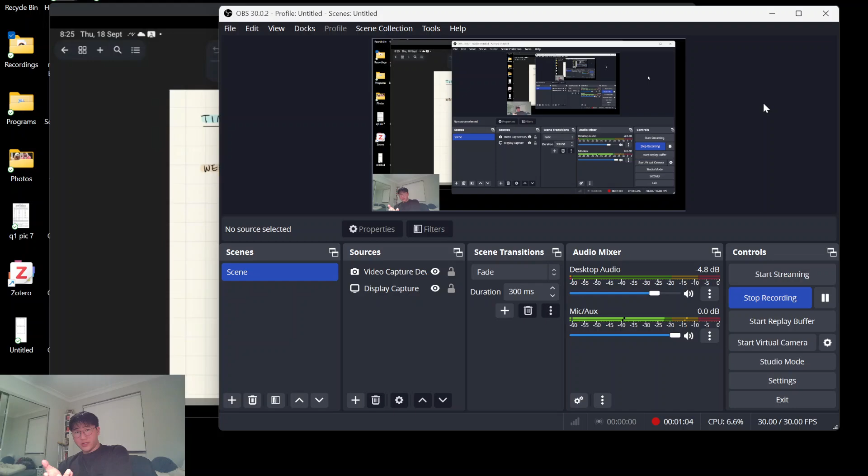With that said, this course is really cool. I got really into timber after simultaneously taking this course and doing my undergrad thesis on a timber related project to do with glue lam timber, which I'll explain in a bit. I liked it so much that even before I started working as a grad structural engineer, I got into a little woodworking phase. So you'll find that - I'll get some examples as we go through this video, like I have some offcuts from woodworking.

So, without further ado, we'll get to my notes.

Week one. So I guess how this course is broken up is into two parts. Week one, we're just talking about timber as a material, and there's a code - AS1720.1, which is our timber code for Australia. All timber structural engineering design revolves around this code. We'll get into the difference between sawn timber and EWPs, but this code documents both types.

Also something else we'll need is AS1170.0, which is our load combinations - if you've done steels and concrete, you'll know what those are, but we'll talk about it a little bit later.

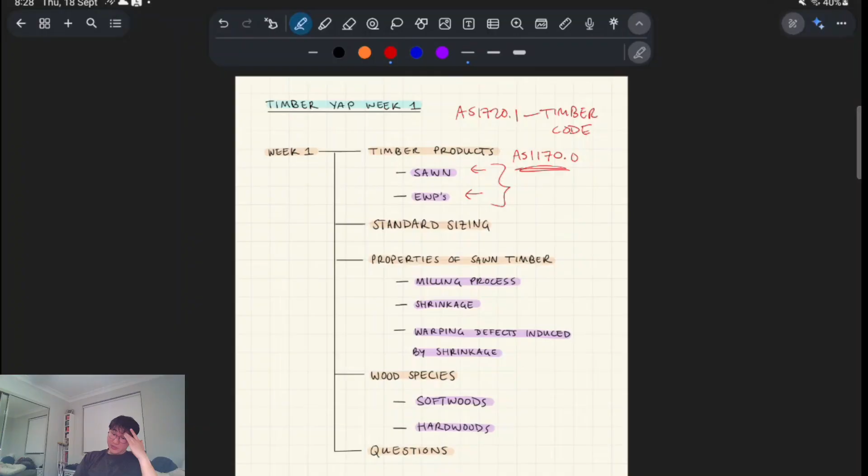This leads to a lot of variability factors in the code. If you think of it like a spectrum of materials, you have steel as the most consistent material, then concrete, then timber as the most variable, because you'll find a lot of natural defects and inconsistencies with how you can grade wood. So timber is very variable, and it requires a lot more fundamental understanding of how it works than the other materials in order to design for it.

So let's get into the rest of the stuff that I've shown on screen later.

As I mentioned, you can have sawn timber and engineered wood products. Sawn timber is basically what you can buy off the shelf at Bunnings, or order from manufacturers - in Sydney we have Blacktown timber suppliers, I think they're called, and those kind of timber yards, timber mills, timber suppliers.

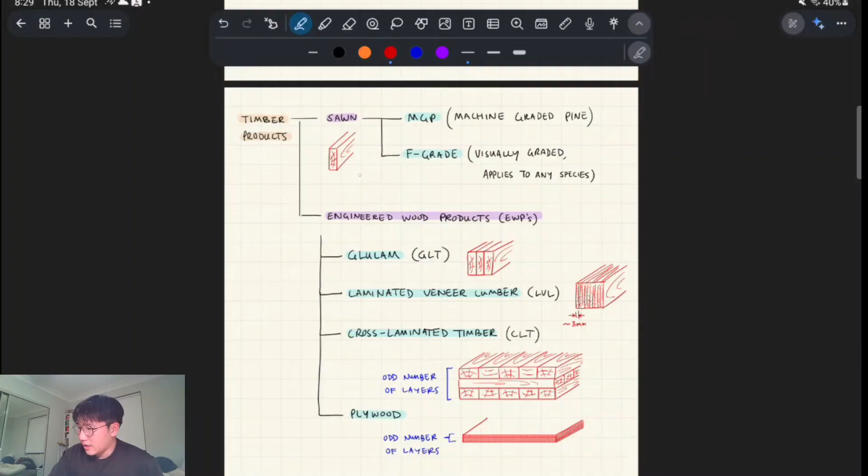In America, they call the woods by their cross section, like 2x4s, 2x6 - that's in inches, which I think is denoted by double dash. You might have heard those terms before - that's just referring to the cross-section size, that dimension, and these are products. If you order it from Bunnings or whatever, you can get it in standard sizes - I think it's like 6 meters typically, maybe 9 meters as well. I'm not sure, but it's whatever the mill size is generally.

In terms of different grades of timber, a timber grade is basically this: you get a pile of logs, you mill it, cutting and processing it into rectangular cross sections.

So what makes one bit of sawn timber stronger than another? There could be variations in the type of tree, some trees more mature than others, variation in species, and variation in natural defects, like a knot in the timber, which would actually be a structural defect.

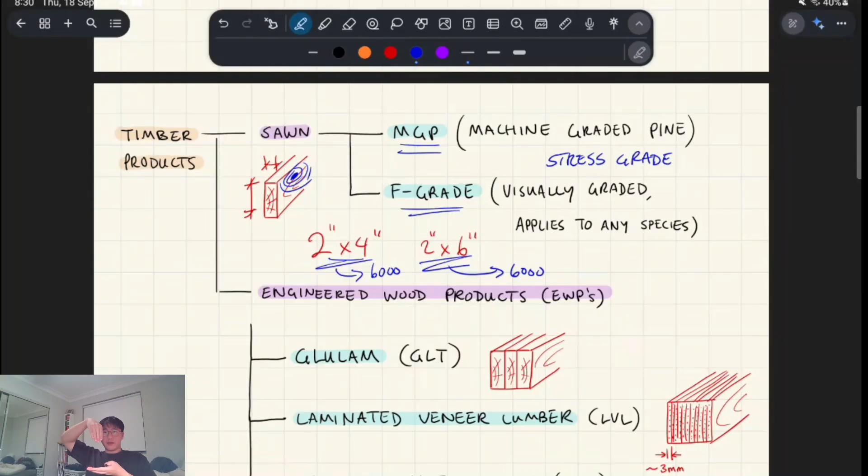So we have to basically stress grade timber. You can stress grade it or destructively grade a batch where you completely break the plank of wood, but usually we stress grade it. There's a little needle that pushes into the timber and does a quick calculation on stress and strain to work out the elastic modulus, the material stiffness. That's how we separate these grades of timber.

For example, we have MGP10, MGP12, MGP15. That would equate to roughly 15,000 MPa in the code - a more specific number for timber stress, elastic modulus. That process I just described was machine grading.

They get the little needle on a conveyor belt - boom, test, stress grade - and it's non-destructive, so you can still use the bit of wood afterwards. Then conveyor belt, stress grade, and keep going.

So MGP uses pine - what is pine firstly? Pine is a fast-growing type of tree, grown on sustainable farms. One problem with timber is that trees can take a very long time to grow, maybe up to 20 or 30 years to mature depending on the type. But pine is a type of softwood, and softwoods generally mature much quicker.

With sustainable radiata pine farms - radiata pine being the species - you can plant more trees than you chop down, essentially. So pine is a very widely used material for that reason. Its strength is okay, but usually on the weaker side compared to hardwoods. Anyway, we use it a lot and can mass produce it through this machine grading process - MGP is a very specific type of product which uses radiata pine.

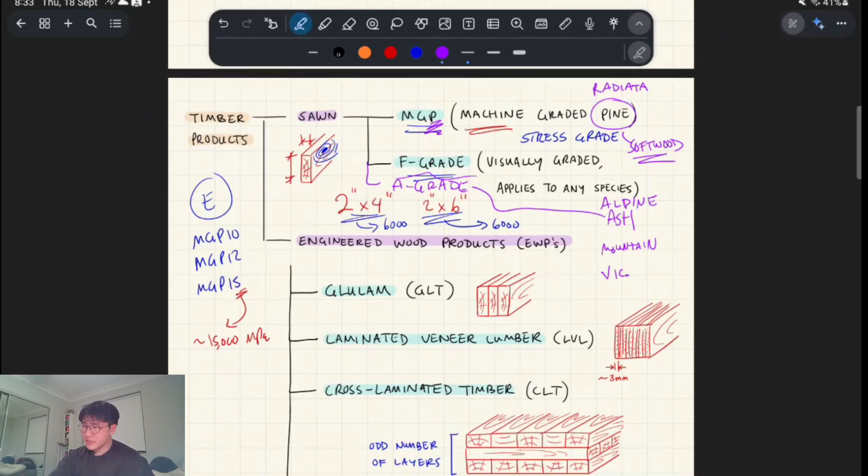But yeah, so that's kind of how sawn timber works. Engineered wood products, sometimes shortened to EWPs - although I think that's just a term people who write papers on timber use, myself included when I was doing my research thesis.

Because in industry, it's more common to use EWP to mean elevated work platform - like in trade, they'll think you're talking about a type of scissor lift, for example, which is an elevated work platform. But in the context of this course, we're going to be calling engineered wood products EWPs.

So there's various types. I've only listed a few, probably the most common ones, and I think these are the only ones in the code - though it's not actually limited to this. I'll give some examples of ones which aren't as used structurally in a bit, but I'll talk about these first. So glulam is basically used as beams.

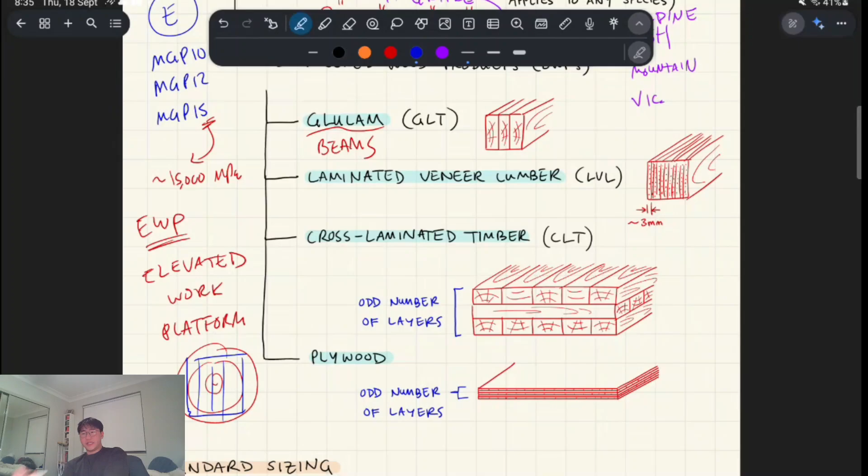Generally, beams are limited by how big the cross section of a tree trunk is, so it's very hard to create large cross sections unless you engineer your own by gluing multiple pieces of wood together. You can stack up, say, 9 layers of planks and get to pretty large member sizes.

That's called glulam, and there are companies that specialize in it and create these GL grade products, as it's called in the code, which are usually used in mass timber buildings.

So mass timber - there's residential timber buildings and there's mass timber buildings. Residential timber buildings are like your stick framing kind of homes. You see it a lot.

It really started in America, where you use a series of sawn timber members, usually treated pine. You'll see the timber is actually green or blue because it's been sprayed with insecticides or fungicides, so that if it rains you're not going to get fungus that affects the durability of your timber frame. That's very common in residential timber construction.

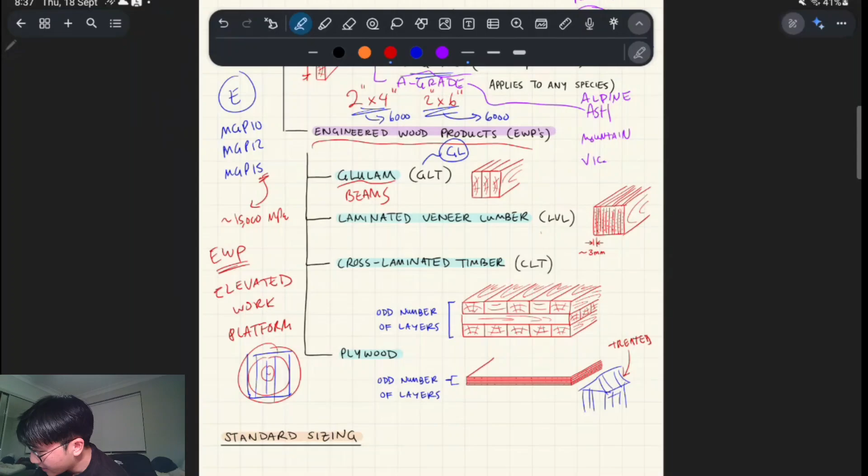You'll see these engineered wood products generally used for mass timber buildings. Another one is LVL - laminated veneer sheets, which are laminated all together to create essentially large beams as well. These are also used for beams.

But the use case is a little bit different. You use more epoxy as the adhesive or glue - you can also use polyurethane, I think those are the two most common ones. Because you have more layers, you use more epoxy, and it actually ends up being stronger than glulam. It might be more expensive, I'm not actually too sure about that.

But you can also curve your beams. If you want to create a parabola shape roof or something like that, you can do that with glulam over large spans, but you have a lot tougher time creating that curved shape unless you have really thin layers which are very bendable. So LVL is quite good for that.

CLT is similar to glulam, but you're usually using it to create entire floors, or slabs. You have these sawn timber cross sections stacked next to each other in one layer, and on top of it you have layers going the other way, perpendicular at 90 degrees, and then another one stacked on top. You always have an odd number of layers - you can have 3, 5, 7, maybe up to 9, but that's getting pretty ridiculous.

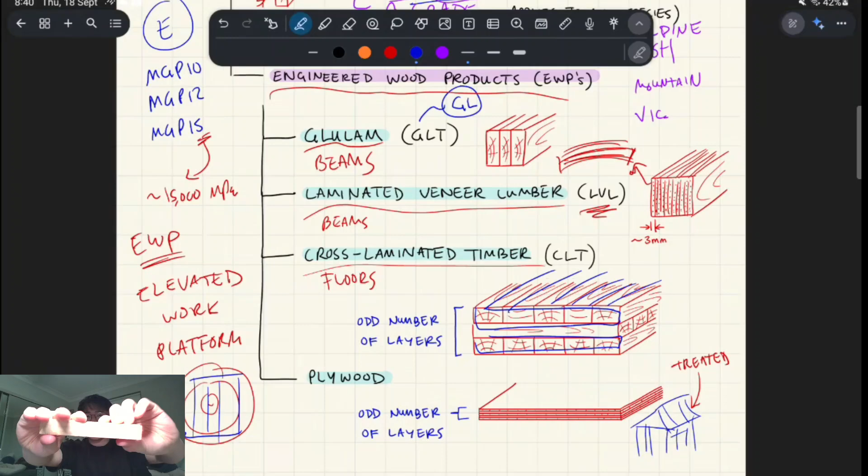So essentially, you can see these fibers running kind of parallel - that's the longitudinal direction. And then you can see the cross section - this one's better, you can see the cross sections have all these little straws, like straws, and that's the end of the fibers. If we bend in this direction, parallel to the grain, you basically have stronger properties. So the longitudinal direction runs this way, and there's 2 layers of that, and then in the minor direction we have longitudinal layers running that way - that's the minor direction.

So if you think about calculations, this will come into play like in week 5 maybe.

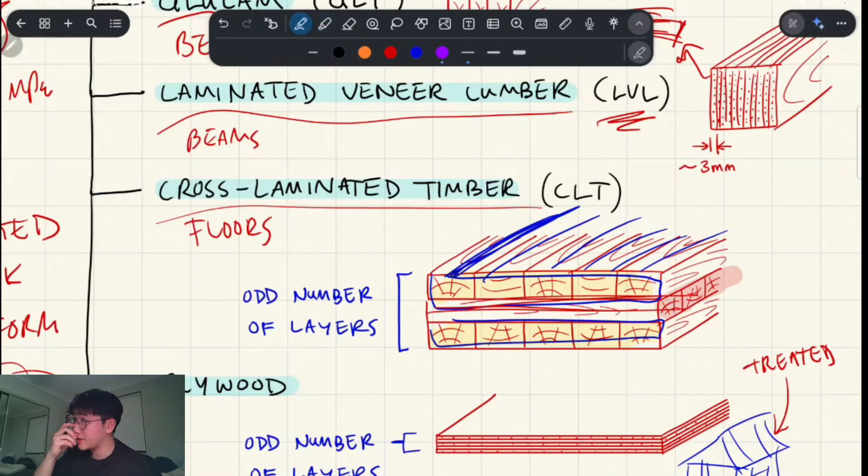This is the cross section, and when we're considering CLT design, it's going to use a different code to the Australian code, which I forgot where I wrote. So it's different to that. We're going to be using Eurocode 5 for CLT design, right?

So basically, to calculate the effective centroid, or neutral axis I should say - that's the bending axis, right? To calculate that, we ignore all the layers which aren't facing in our direction that we're considering. So if we're considering the major direction, which is what I've highlighted in yellow, the neutral axis will be positioned in between that. So if we have 4 layers instead, right?

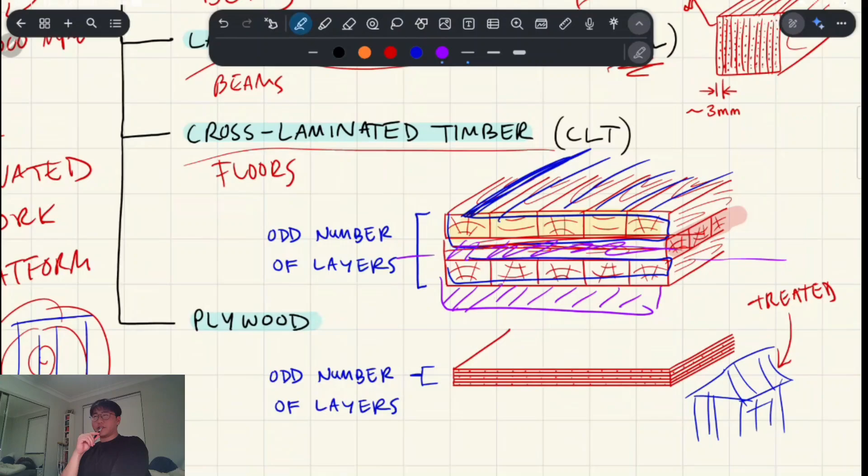The neutral axis becomes unsymmetrical. So it becomes like here and here. And if we have this going on, you're going to end up with worse calculations than if you had an odd amount of layers. So that's what I'm trying to say there.

The same principle applies to plywood, but just on a much smaller scale. If you've done woodworking or anything, you've probably seen plywood, and it's very thin - like this would be 13 layers of ply, I don't know how thick it would be, like 3 centimeters or something, maybe not 3 centimeters, maybe about 2.5 centimeters, whatever. So that's what happens when you have an odd amount of layers - it has better, more dimensionally stable properties.

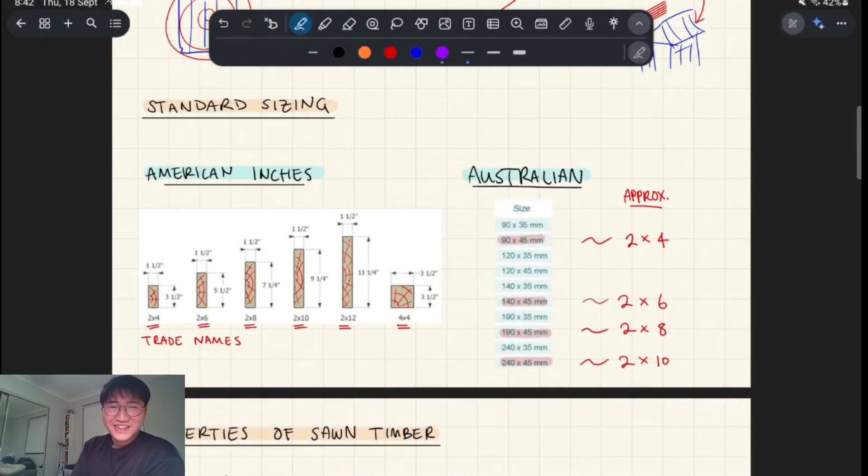Okay, cool. Because I normally would record these weekly in front of people, I would stop and ask if people have questions, but because it's just myself and I'm recording this offline, I'm just gonna be rambling.

So yeah, okay, so standard sizing, as I mentioned, we kind of have these trade names, American trade names, right? And you have like 2x4s and 2x6s, etc. But in reality, there's...

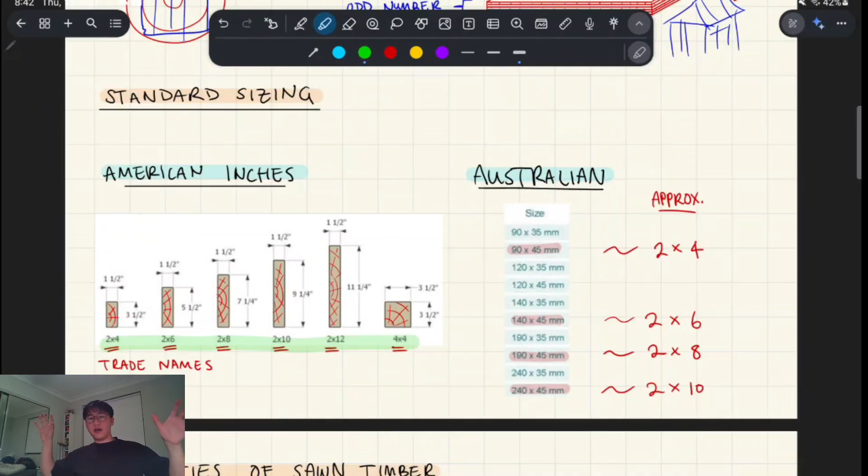The real dimensions - so this is in inches, right? A 2x4 would actually be 1.5 inches by 3.5 inches. And in my opinion, this comes down to the whole processing of the timber.

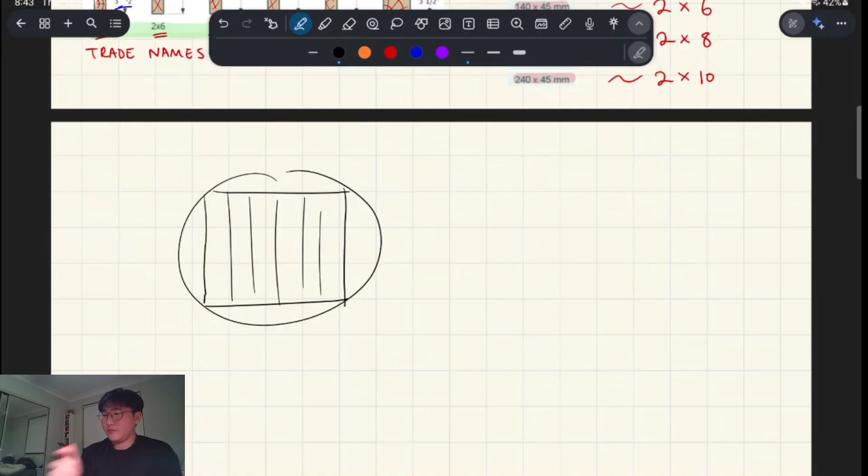So if you have a tree log like that and you're cutting it, right? And so you're just cutting it like that. The blade has a certain thickness which erases material. And if we're trying to, I don't know if this looks exactly like this, maybe like that - if we're trying to make a 2x4, I'm just gonna do this in inches because whatever. And we're doing something like this, right? Because our blade cuts and does that, we've eliminated some material already, right?

And then this stack of rough sawn wood gets placed, and it came from a live tree, so it needs some time to dry, and it's in a process called seasoning. And in that process, it's going to shrink a little bit and warp, and so we're going to get some undesirable properties.

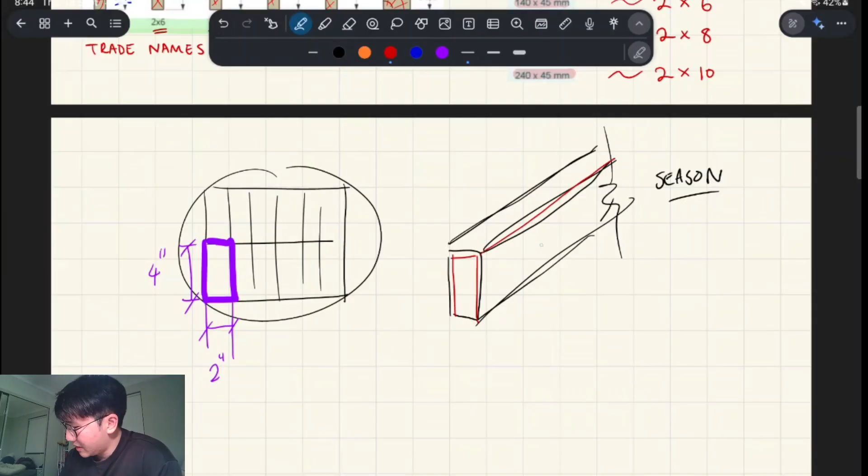Now, at this stage, if you want to refine your wood to be perfectly square, as in like these cross sections perfectly square, we're going to have to erase material again. And in that process, we're losing more and more of our cross-sectional dimension. Cool, so that's how that works.

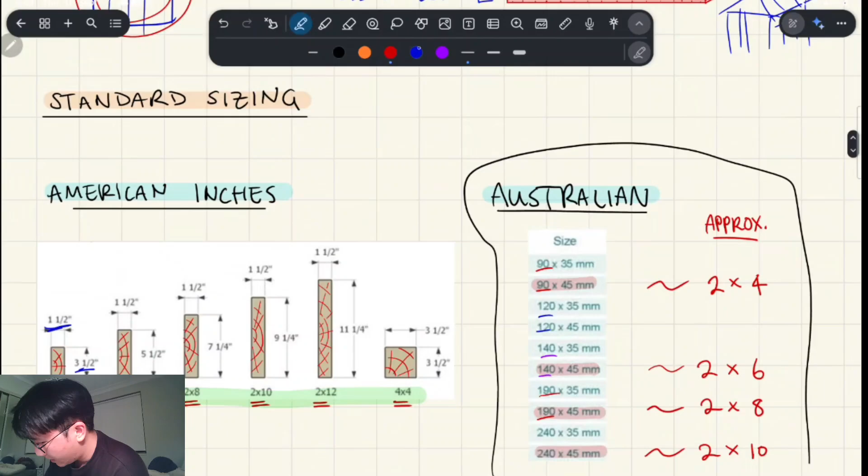So those were American kind of units. In Australia, we have various depths, right? We have 90, we have 120 - these are the standard depths - 140, 190, and 240, right? The list goes on, but I've just included the common ones. And between these, you can see that we have two standard widths as well - you have the thinner one, which is 35, and the thicker one, which is 45. And those will have different kind of use cases as well. Yeah, so that's kind of how that works.

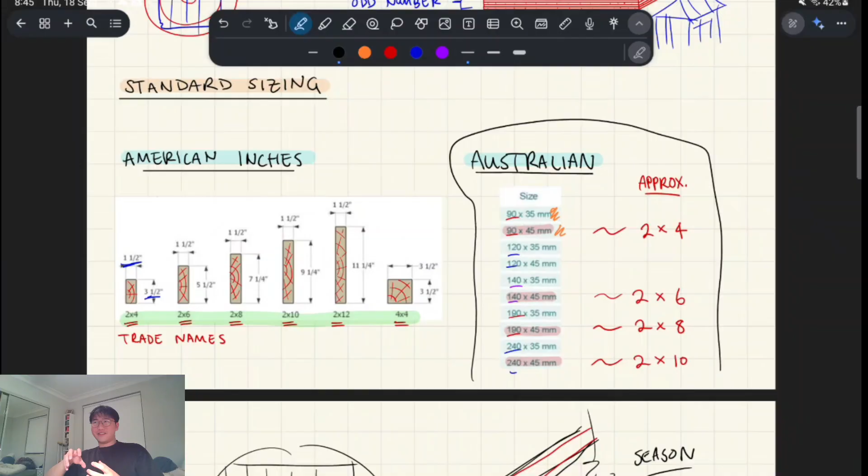And think of the sizing like, you can make your own section sizes, but these are the ones that are milled and mass produced. And it's good to have standard sizes - it's similar to Lego, you don't want all your Lego to be slightly different sizes, because then they can't fit together, right? So anyway, think of it like that. They come in standard sizes essentially.

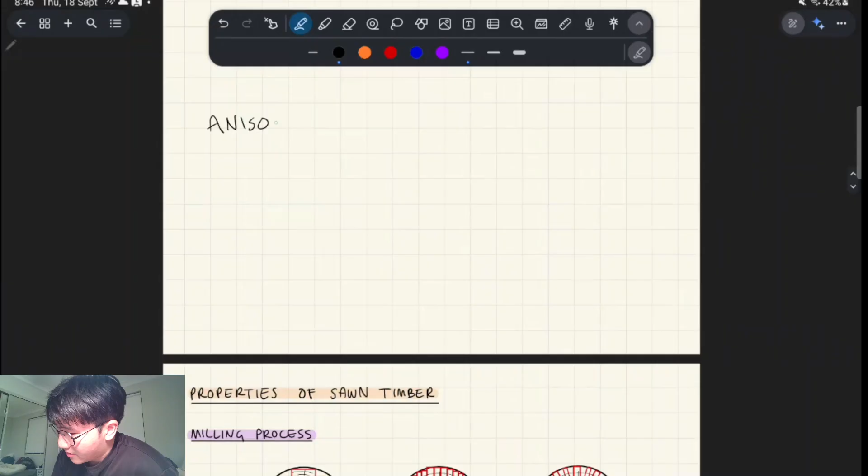Okay, so milling process. We have a few different types of ways that wood is sawn, and this will tie into something we're going to talk about in a second called shrinkage. But you'd think that this is pretty trivial, right? Like how you cut the wood doesn't really matter, but in reality it does, and that's because wood is an anisotropic material, right? Which means it has different behavior in different directions.

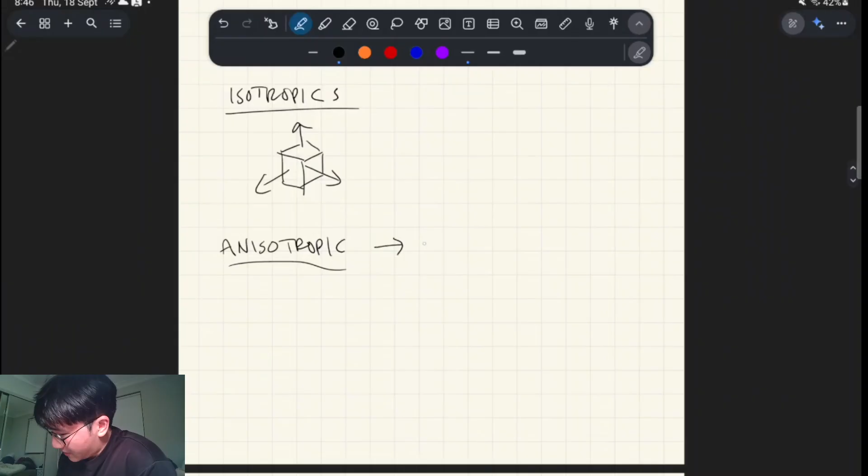Now, isotropic materials are basically something like steel, right? Where it has similar properties in any given direction, essentially. But anisotropic materials don't, right? And there's a very specific type. It's not specific, it's more of a simplification.

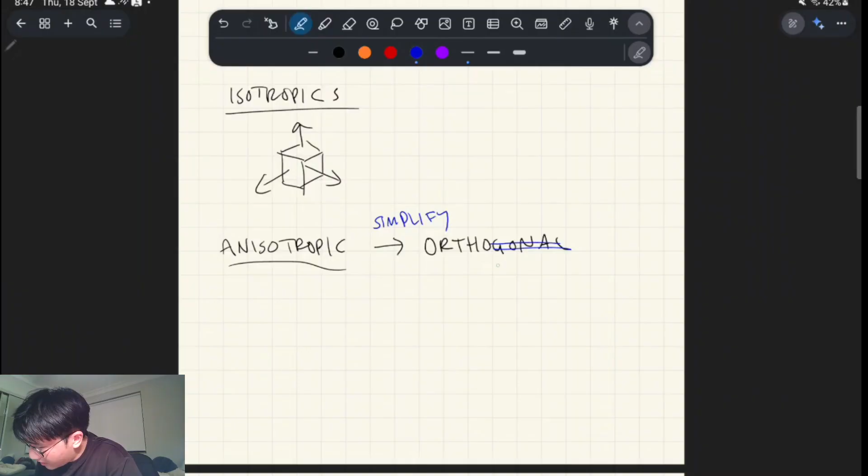Because timber is a very complicated material, and we want to be able to have an approximation which can cover most cases, and so we simplify it to be orthotropic. So orthogonal means at 90-degree angles, right? So if you have your X, Y, Z directions, those are orthogonal to each other.

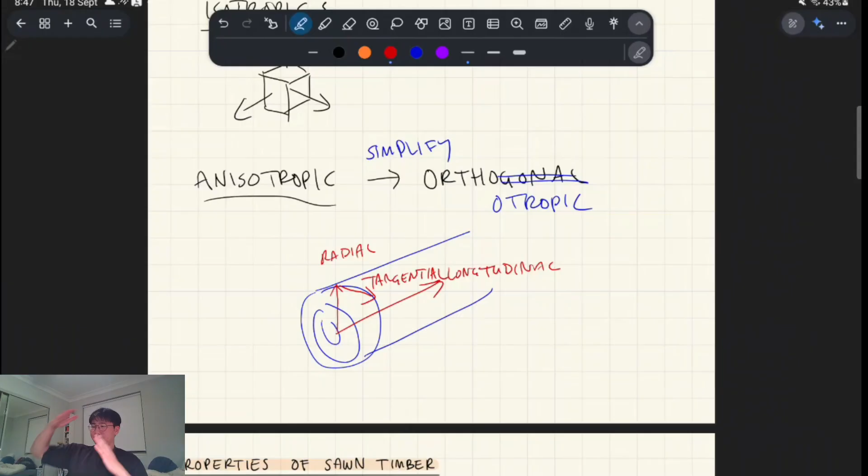Similar idea for timber. So I'm going to draw this in 3D. One direction is longitudinal. Another direction is radial. So what I mean by radial: you see the growth rings, right? So in the direction of the radius, like an increasing or decreasing radius, that's the radial direction. And then tangential. Tangential is just tangent to that.

And so essentially, the cheapest way to mill a piece of wood is flat sawing it. So your saw doesn't really need to change directions or anything. It just processes the wood in a very straightforward way. But then you end up with these pieces of wood, which if you go to Bunnings, you'll see quite commonly, if you're buying MGP or whatever.

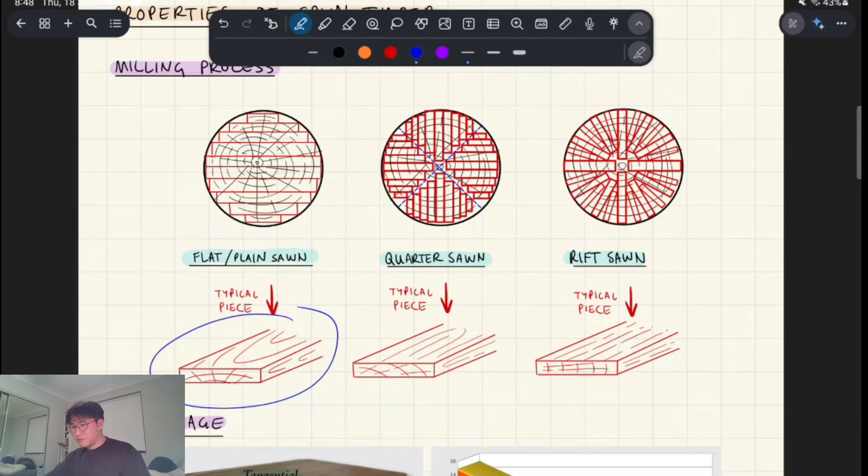Now, quarter sawn wood is processed a little bit differently. So you cut it into quarters firstly, and then you get those quarters and process it as such. And then you'll end up with these kind of pieces. Let's just say, for example, that it's that piece. So you get these ideal pieces in the middle, but a lot of your pieces will be off to the side, and so you get this diagonal kind of cross section.

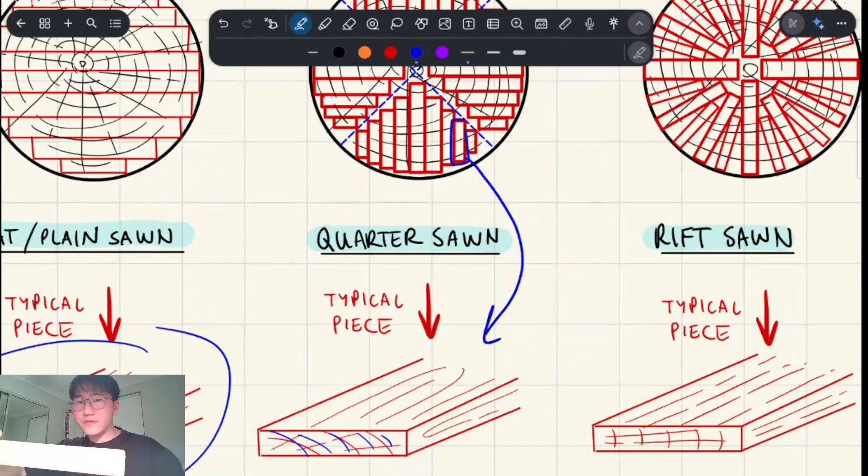Actually, this bit of woodworking offcut that I have is Victorian ash, and so, I hope you can see that. Oh, the light, it's pretty bright. Hopefully you can see that. Yeah, there we go. Look at that. See these beautiful lines? That's one bit of wood. You can see these beautiful lines, and that's the growth rings, which represent one year of how old a tree is.

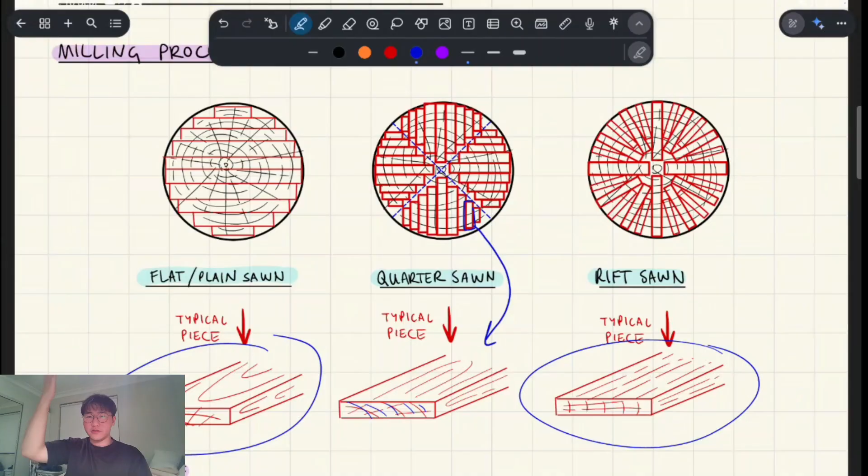Okay, so where was I going with that? So rift sawn, you see that these growth rings are perfectly in line with each other, and that's if you keep turning your blade or the material that you're trying to cut. So why does this actually matter, other than the fact that maybe it looks nice?

Well, something happens in wood called shrinkage. As you can imagine, your piece of material will want to shrink due to various things like moisture conditions in the air, temperature. And this is a process that happens over time. Now, like I was saying before, we have a longitudinal direction, radial direction, tangential, and the graph on the right, I think you can especially see it on the left, shows how much of a difference these three directions get relative to each other in terms of shrinkage.

So the least shrinkage happens in the longitudinal direction. So if we have a bit of wood like you see here, the direction where I'm pushing it or pulling it, that's the longitudinal direction. It's basically not going to shrink that way; it's a very negligible amount. But in the cross-sectional directions, radial and tangential, you're going to see a lot more shrinkage, and especially in the tangential direction, you see the most shrinkage.

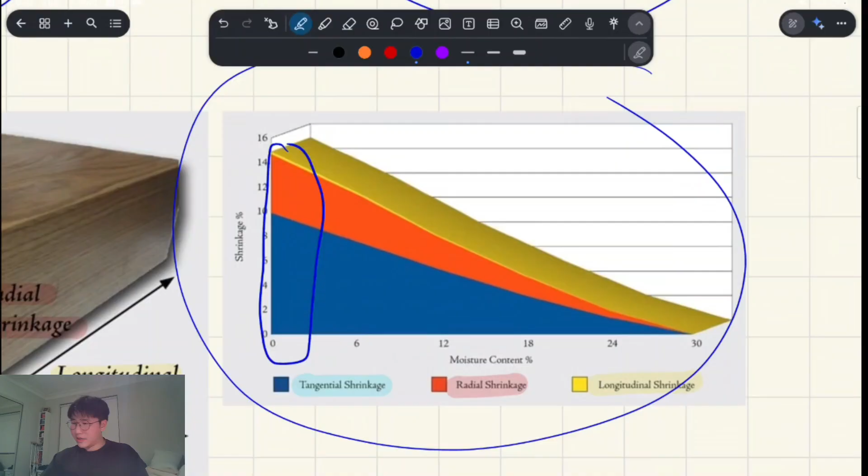Yeah, so this leads to warping defects induced by shrinkage. So cupping will especially happen the most when you have this flat sawn piece of wood.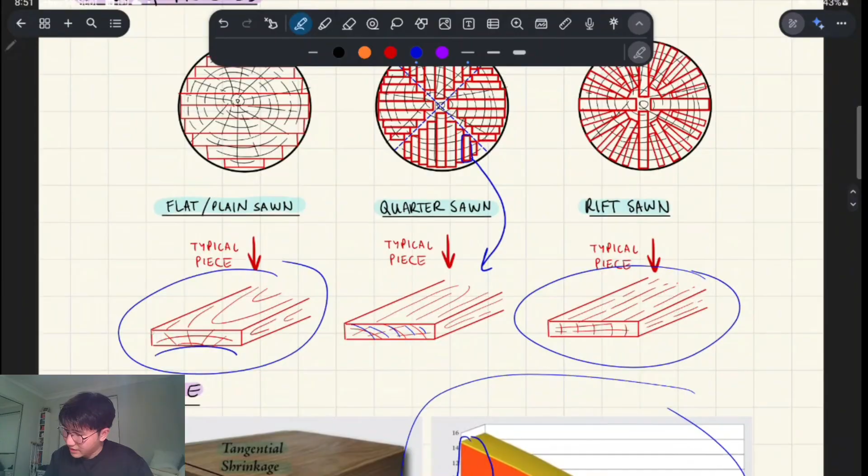So this will want to basically cup like that, become a sad face like that, and obviously then your wood won't sit flat, and that's not very optimal. That's one type of defect.

We also have bowing. So this happens when you have a fairly long piece of wood, say it's like that, right? So one side's flat. In the weak direction, if I'm looking straight onto it, so if my eye is like here, you'll see it bow out like that, right? In the middle, maybe like here. You can see this start to bow out like that. So again, it won't be flat if we're resting it on its minor axis like that. It won't be flat, and you'll see this little bit stick up, which is not ideal.

Crooking is less likely to happen because it's in its major direction. It'll be bending about a stronger axis, so crooking doesn't happen so much. Kinking also doesn't happen so much. It's probably more so due to a knot or something being here, where it's grown differently, or physical damage or something could cause kinking.

Twisting: maybe the grain is orientated diagonally, and so its tangential and radial directions are slightly opposite, and so it might twist a little bit. And one way you can test if something is twisted or not: say you get a piece of wood like this, you put it on a table, and you put your fingers on opposite corners, and if it's rocking back and forth, it's twisted. Right. Okay.

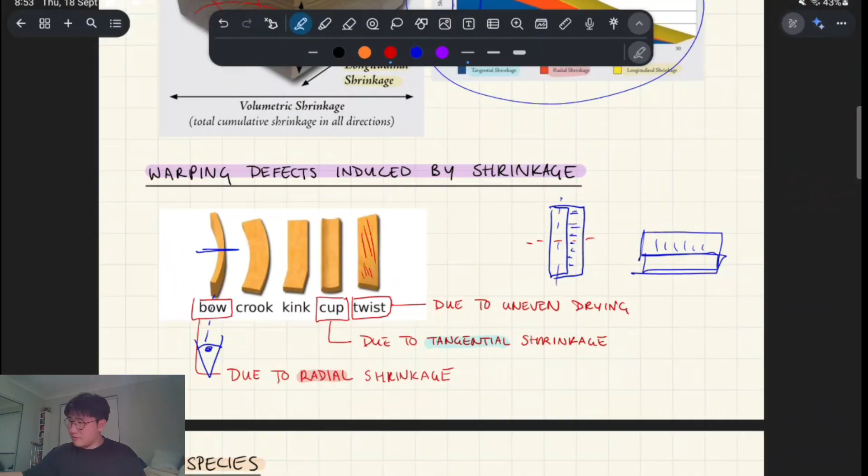Wood species. So we have softwoods and we have hardwoods, as I mentioned a little bit earlier. Now this is a little bit of a misnomer because this is just what we call coniferous trees and deciduous trees; it's not actually an indication of how strong the piece of wood is. In reality, we have exceptions. We have hardwoods like balsa. If you've ever done a little science project or architectural project where you had to use balsa, that's the toy wood you're using, and it's so light. It's as light as foam pretty much. And that's a hardwood, just because how it's grown is deciduous. But generally speaking, this is true.

Softwoods grow much quicker. These take about 5 years or so to mature, whereas these take like 20 years or so. And so there's ups and downs to using both. Probably the number one downside to using hardwoods is sustainability and just really being able to replace the wood.

So some examples for softwoods: in Australia, we'll see radiata pine. I think it's originally a European tree, but it's grown in Australia. It grows very quickly. It's kind of spread all over the world now. And Douglas fir is another one. Douglas fir will have very prominent growth rings, and they're very orange. So if you see a bit of Douglas fir, you'll see that these growth rings have quite dark markings. And again, the whole thing's orange.

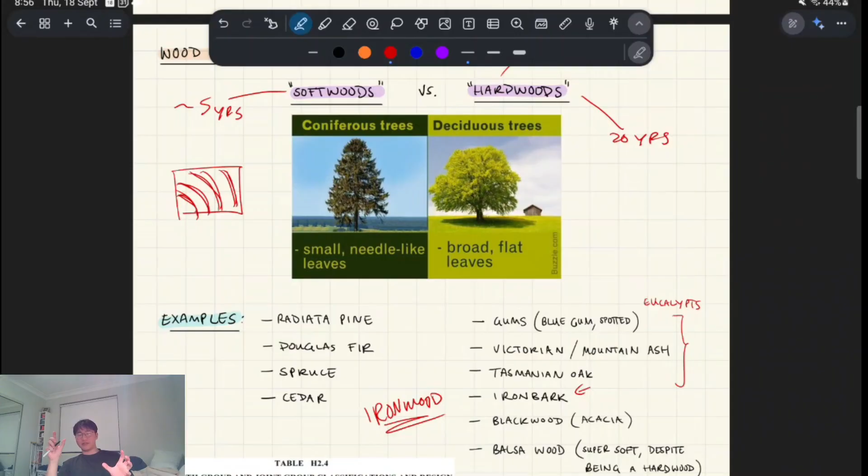And yeah, as I said, balsa wood. So a little fun fact about balsa wood. I went to go buy timber once for woodworking, and they said they ran out of structural balsa wood because the last time people bought it was years and years ago when they were trying to film, I think it was the Matrix sequels or something in Australia. And they bought a bunch of balsa wood to use as the walls that they're just gonna karate kick through. Because the wood's so soft, it's relatively safe to do that. Yeah. Anyway,

densities. So water is 1,000 kilograms per meter cubed, right? And relative to that, for our softwoods we have a design density lower than that. All of these are lower than that, which means that they can float in water essentially. So if I just chucked a plank of pine in water, it's lighter, so it'd actually end up floating to the top, right?

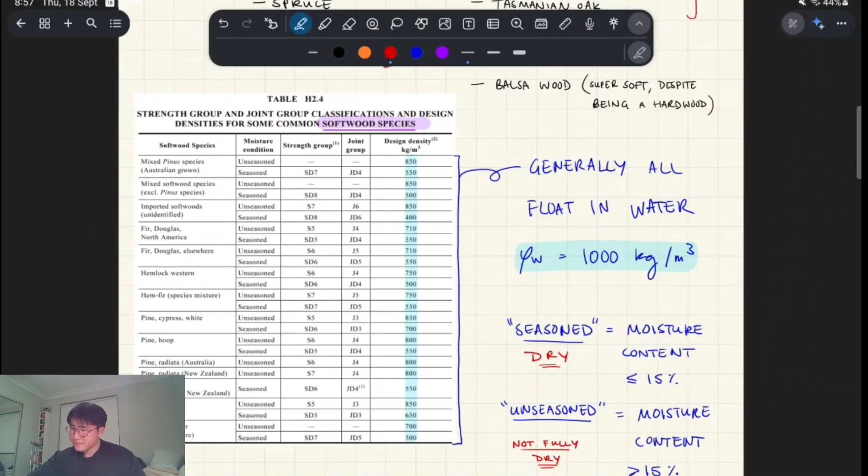Something I want to touch on as well, which I haven't, is the fact that things can be seasoned or unseasoned, right? Seasoned means it's dried and it's dried properly. Unseasoned means it's not fully dried, basically. And so when you cut down a tree, it's going to be unseasoned because it used to be alive, it used to have water running through its veins. Like humans are 70% water or something, right? I don't know what percentage a tree starts off as, but it takes a while to dry essentially. And there's a rule of thumb that I learned during woodworking.

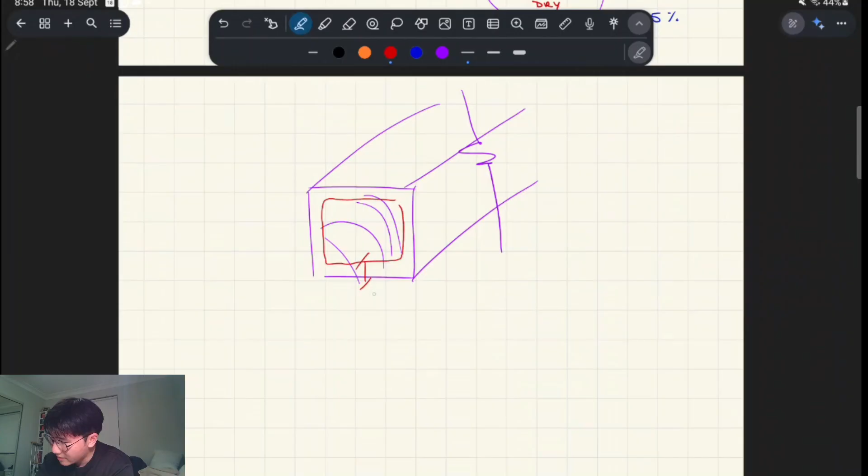Let's just draw it as a square prism. If that's a bit of wood and it's unseasoned, it will dry at a rate of 1 inch per year, right? And so if you go to Facebook marketplace and you see all this timber that's much cheaper than what you can buy on the market, and you go there and buy it and realize that it's not dry... So a lot of the costs involved in timber is from drying costs, because you have to leave it in some dude's shed for a couple of years before it's actually usable, structurally as well as for woodworking purposes.

And I say for woodworking or furniture making, because you don't want your wood to move after it's been used to make a beautiful woodworking box or a table or something, because it's gonna shrink and warp due to this process of drying, essentially. Anyway, so yeah, that's something to consider.

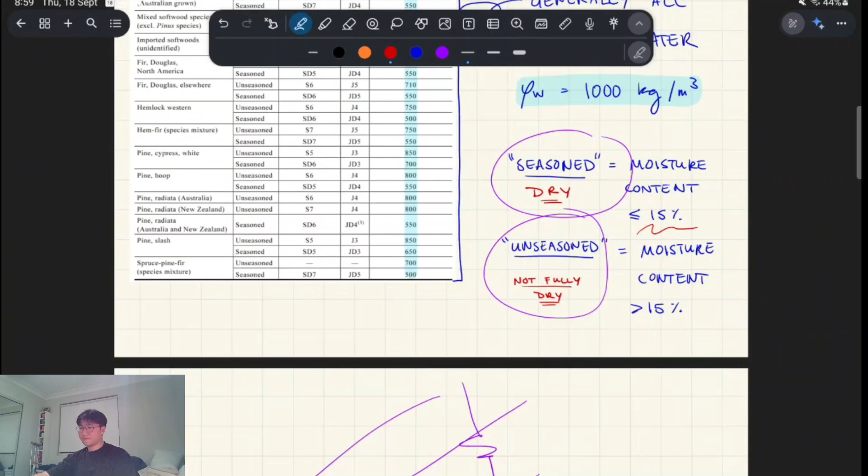Atmospheric moisture is, I don't know, I think it's around 10 to 15%, depending on where you are, unless you're in very northern Australia, like upper parts of Queensland, upper parts of the Northern Territory and stuff like that. So when you're lower than 15%, you're dry, basically. Greater than 15% is not fully dry. There's another threshold number, 25%. If you're between 15 and 25%, you're partially dry. Anyway,

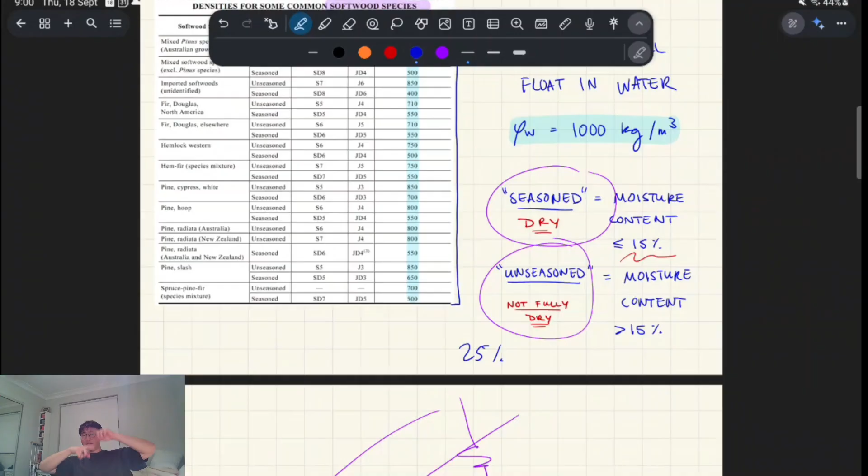what were we talking about? We're talking about densities. So hardwoods are generally more dense than softwoods, as you can imagine, and some of these numbers are above 1,000 and some are below. And it also depends on whether it was unseasoned or seasoned. So basically, if it's greater than 1,000, it's going to sink in water, right? Okay.

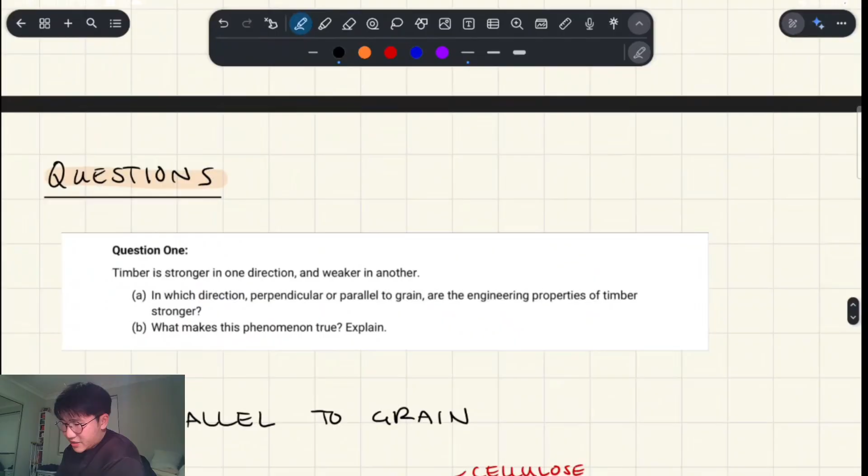Okay, so question 1: timber is stronger in one direction and weaker in another. In which direction, perpendicular or parallel to the grain, are the engineering properties of timber stronger? And what makes this phenomenon true? Explain.

So when we're talking about parallel or perpendicular to the grain, that's the grain, running left to right from what you can see here. Parallel to the grain is the longitudinal direction. Perpendicular can refer to this way, or like this way, in and out of the page here, or up and down.

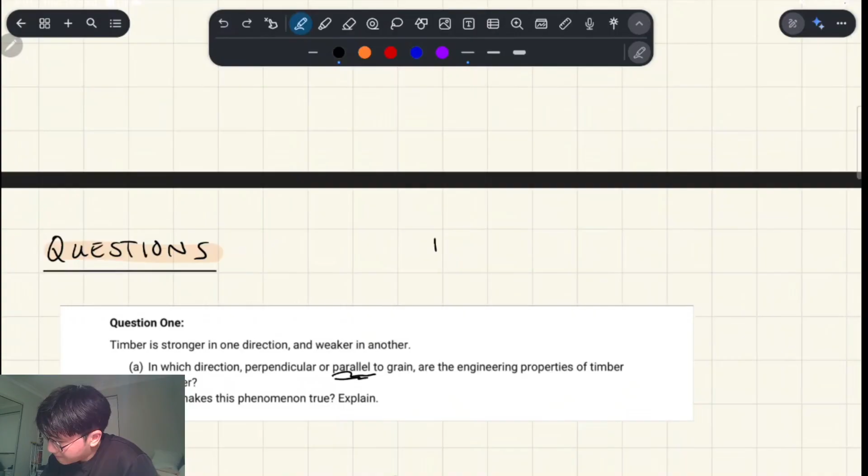So basically parallel to the grain, I'll show you in a drawing. I'll do a rectangular prism. So parallel to the grain, let's just say tension. Tension parallel to the grain is going to be stronger than tension perpendicular to grain, because we're splitting the fibers apart, essentially, if we're doing perpendicular.

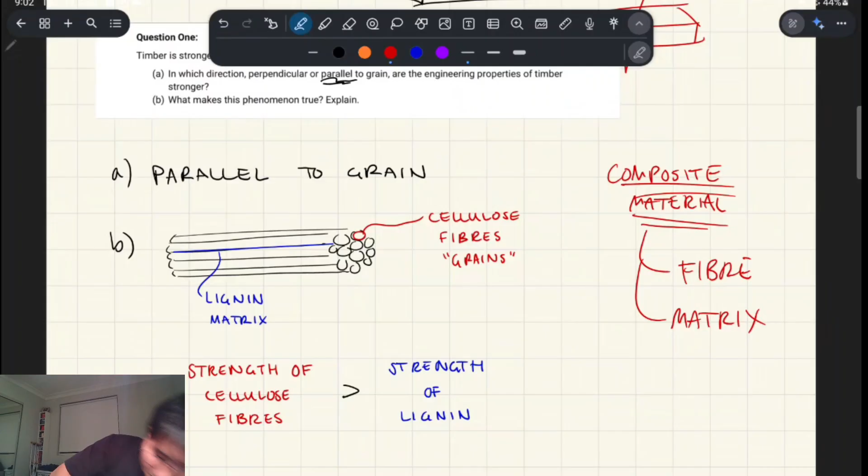So you have to understand from a material science perspective what a composite material is, because that's what timber is. It's a composite material. We have a fiber material and a matrix material. Your fiber material in this case is called cellulose. Cellulose are like little straws, bundles of straws, and that's going to help with understanding the bending and all these other mechanical properties of timber.

So they're like little straws, and if you bend it, the fibers is what's giving it strength, essentially. But if we pull it perpendicular to the grain, we're actually relying on the strength of the matrix material, which is called lignin, which is like the glue that binds the whole thing together. So if we're pulling it apart, we're not relying on the strength of the fibers anymore, we're relying on the strength of the matrix in between.

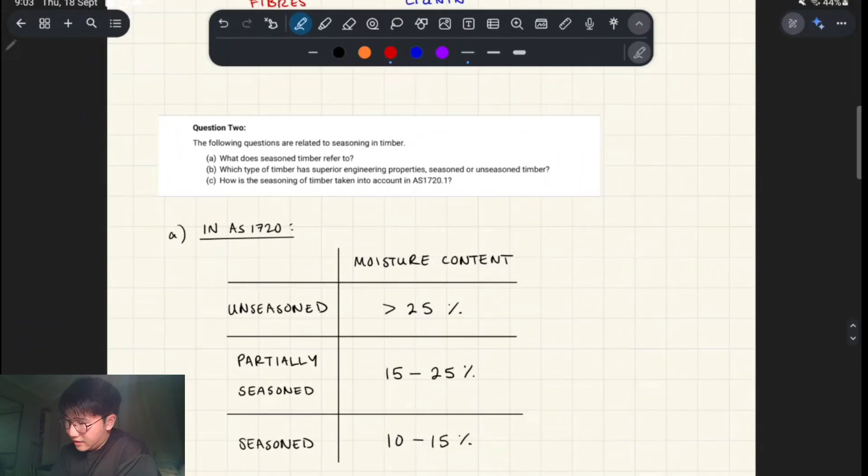Okay, question 2. The following questions are related to seasoning in timber. What does seasoned timber refer to? Which type of timber has superior engineering properties, seasoned or unseasoned? We've kind of talked about this, how, but we haven't talked about why. How is the seasoning of timber taken into account?

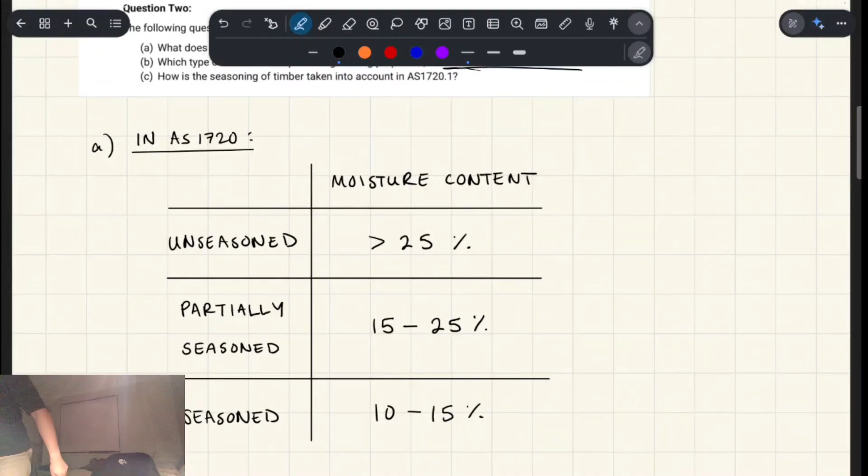So yeah, I've talked about this part. We have different moisture contents, and based on that is how dry timber is, and we call that seasoned when it's dry.

Part B was which type of timber has stronger properties. So seasoned timber has... actually unseasoned timber has less properties.

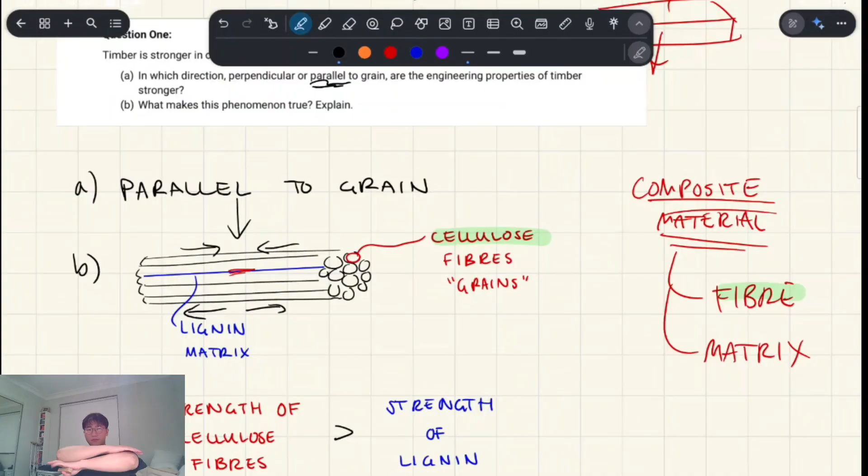Essentially, if I go back to this, if we're in bending, I apply a perpendicular force, which causes compression at the top. Let's say there's a beam basically, and tension at the bottom. These individual fibers are trying to slide against each other, and water acts as a lubricant and enables this sliding process more easily, which is a bad thing, because we want them to act in unison. So yeah, less moisture means better mechanical properties.

So the last part is, how is this taken into account in the code? I've listed some examples here, but to be honest, you don't need to know exactly all these terms yet, because these terms will be covered throughout the term.

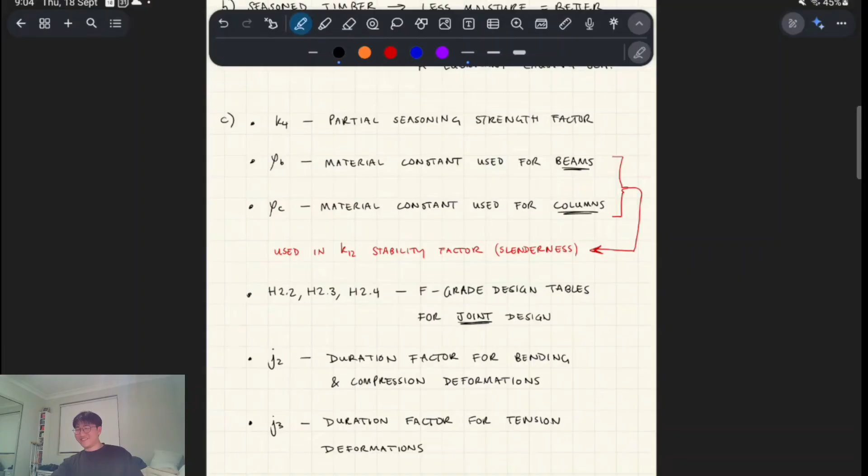Okay, question 3. You're designing a flooring system and its supports. This question is basically getting you used to the terminology involved in timber floor design, and there's quite a few terms, some we haven't talked about yet. You basically have to think in 3D to understand how these structural systems work, which is a bit unusual if you've only done concrete and steel.

So let's go through this slowly. You're designing a flooring system and its supports. The expected ultimate and service loads are 5 and 3 kPa. I know at least one viewer of this video hasn't done steel and concrete, which means they don't really know what ultimate and serviceability loads are, so I'll go over that briefly.

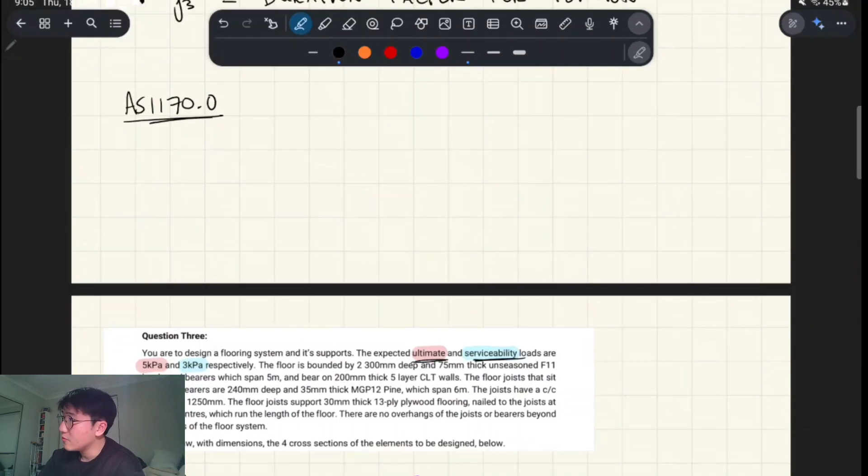So in the code AS 1170.0, we define load factors. I'm going to go through an analogy, you might have heard me talk about this before if you've watched some older videos. Let's just say we're looking at scaffolding. We had to design some scaffolding for 3 tradies, each 100 kilograms heavy. So when you're designing this scaffolding, you know it's going to hold 3 tradies.

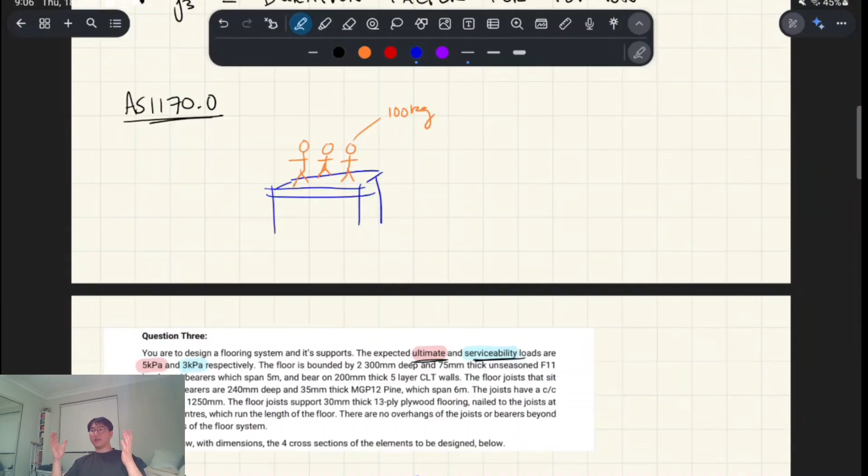Are you going to design it to essentially be able to only hold 300 kilos? Probably not. You're going to introduce some kind of factor of safety, right? And so we have different words for this. What you're going to do is under-exaggerate how strong your scaffolding is.

That's called a capacity reduction factor, which is a form of factor of safety we use in Australia for structural design, usually denoted by phi. Now in the timber code, it works a little differently because we have something called K factors. We'll cover this next week. K factors are generally reduction factors, though a couple are modification factors, meaning they can reduce or increase the strength, but generally they're reduction factors. So unlike the other codes, which just have your phi factor, in timber we also have to account for K factors.

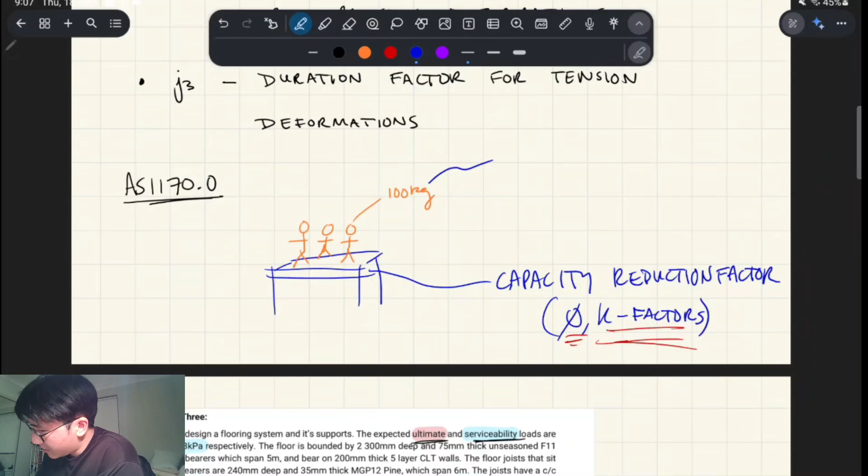Now these were part of the timber code, which is 1720.1. Now just from a loading perspective - because this isn't exclusive to timber, or steel, or concrete, this is just loads in general - you have to exaggerate the loads. You have to pretend that these tradies, instead of being like 100 kilos, are like 120 kilos or something. Worst case scenario.

In this code, our load combinations code, we have exaggeration factors basically, and there's a couple for strength design. We have 1.2G plus 1.5Q. We have 1.35G. We have 1.2G plus W, which is downwards wind. We have 0.9G minus W. So those bottom two are wind cases, which we'll probably talk about later in this term, but these ones you've probably seen more commonly in concrete and steel.

So firstly, what's G and what's Q? G are dead loads and Q are live loads. Both are gravitational loads, but it depends on how long these loads are applied for. So dead loads can include the self-weight of the material - say you're designing a timber beam, you have to account for how heavy the beam itself is. That's self-weight.

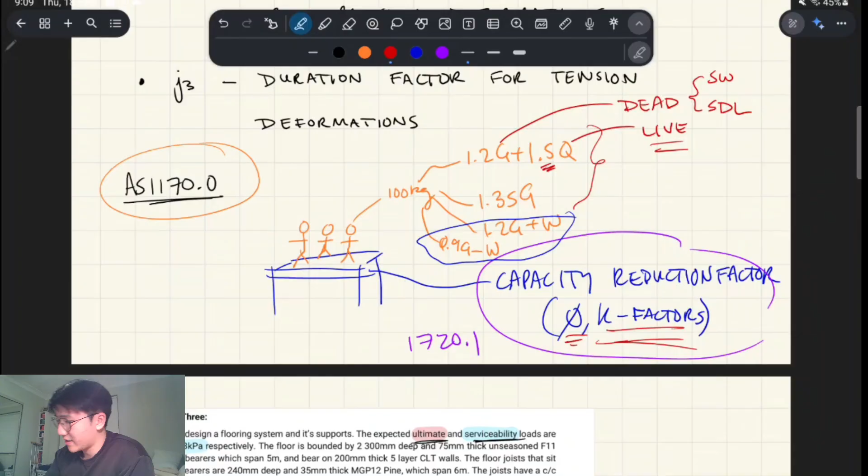So because you don't know as much about live loads - they're more variable - you have to exaggerate them more. That's why there's a 50% increasing factor for live loads, whereas dead loads are more consistent, so we only have a 20% increasing factor. Okay, cool, does that make sense? Yes, yes it does, okay.

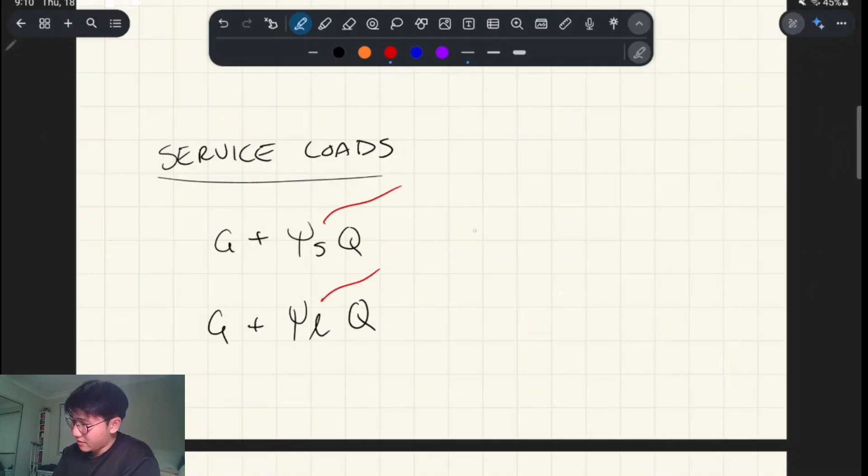Service loads - I haven't talked about this whole thing yet, so that was just strength. We have service loads as well. Service loads are everyday loads. Let me write down what they say in the standards: you have G plus psi-S Q, and G plus psi-L Q. So this is the short-term factor and this is the long-term factor. Long-term factor is 0.4, short-term factor is 0.7.

So unlike before, instead of exaggerating the loads, we actually under-exaggerate the loads a little bit. This is because these service loads are everyday loads - it's like what you'd expect on a typical day for the service life of this structural member. And in the short term, you'd actually see a higher factor.

An example of this is like imagine the loading on a classroom floor in a uni. In the short term, say the term's just started, like a week or whatever, there's just lots of people walking around. So the majority of the floor is going to be loaded with people, let's just say - so in the short term, it's 0.7.

In the long term, you have to consider that this building's not going to be occupied all the time. Like during the holidays in uni term, you're not going to be loading it, and so your sample size increases over time. Generally, the law of big numbers has reduced the live loading because it's not going to be there all the time. So that's how we design our buildings, bridges and structures - service loads are the numbers that govern.

Okay, cool, so sorry, where was I? Let's talk about timber now. So the floor is bounded by two 300 mil deep and 75 thick unseasoned F11 hardwood bearers which span 5 meters.

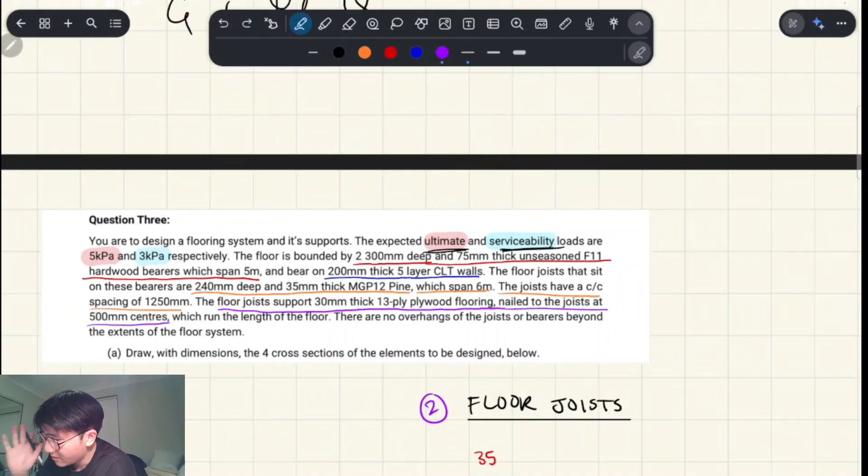So the first thing you've got to ask yourself when doing this question is, what the hell are floor joists and bearers and stuff like that? I think the most intuitive one to start with is the plywood flooring, because you kind of know what plywood is, you kind of know what a floor is.

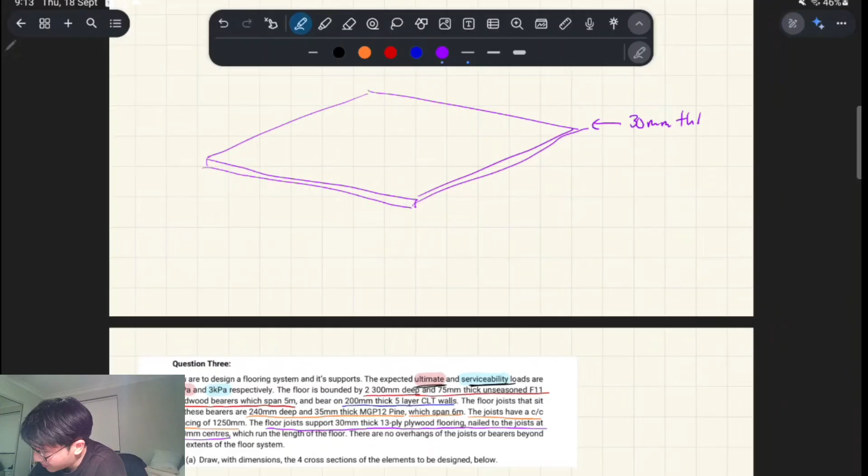So it might look like that, and it's saying this is 30 mil thick, 13 ply, so there's 13 layers of ply in this floor. 30 mil thick is not very thick. If you imagine yourself standing on that, spanning 6 meters one direction and 5 meters the other direction, you're going to punch a hole through this plywood. If that was all it was supported by, it would deflect so much and probably break.

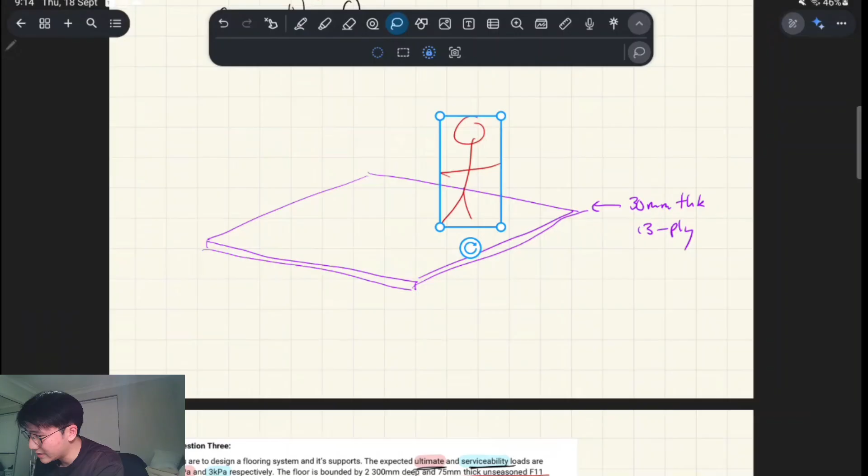And so we have to basically account for a person - how do I do this? Imagine a person standing here versus here versus here versus here versus here - there could be various point loads. So we're going to have to spread out the loads somehow, and give this bit of flooring stiffness along any given portion. The way we do that is we introduce floor joists.

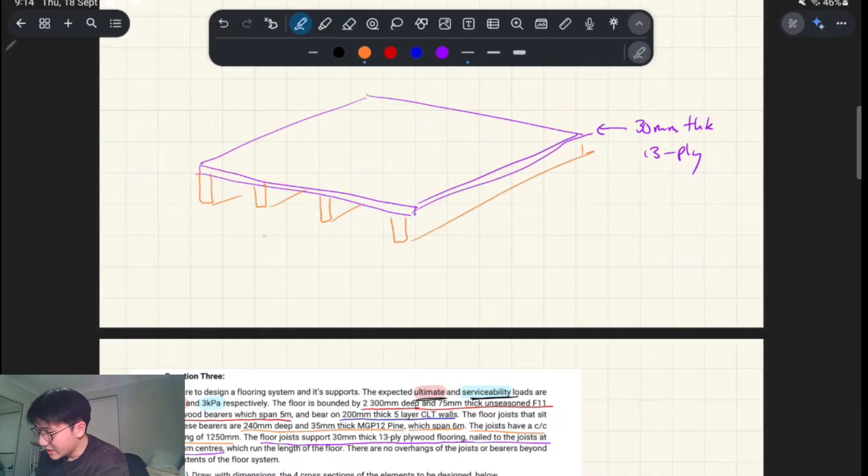So floor joists have regular spacings like this - these are the floor joists, in orange for clarity. The floor joists have some kind of center spacing - here it says the floor joists have a center-to-center spacing of 1250. They also have certain dimensions: they are 35 thick and 240 deep - that's your cross section.

I'll probably have to talk about the nailing. So the floor has to be nailed at regular centers to these floor joists so that it doesn't slip around. These nails are at 500 centers, so hopefully that makes sense.

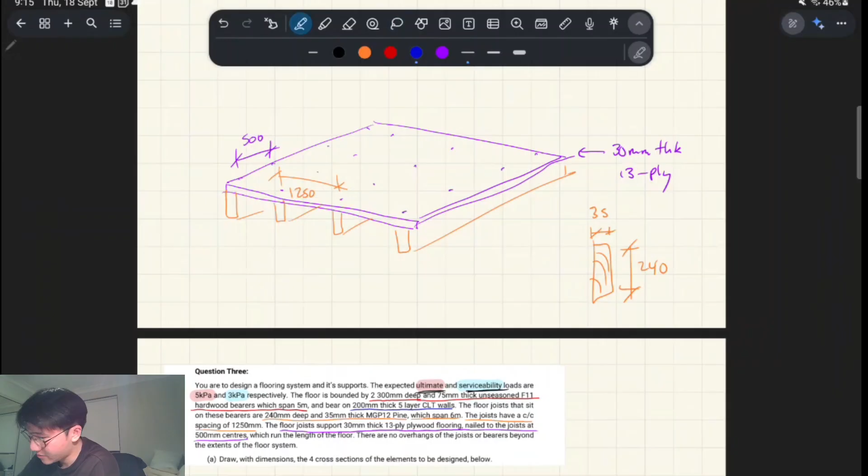Next is - I'm doing it top down, as a structural system. Gravity finds its way downwards, so essentially the loads will spread out - you can pretend there's a uniformly distributed load over this entire thing, and it's going to want to go from the floor into these floor joists. These floor joists are simply supported, and the weight of whatever it carries has to land on these bearers.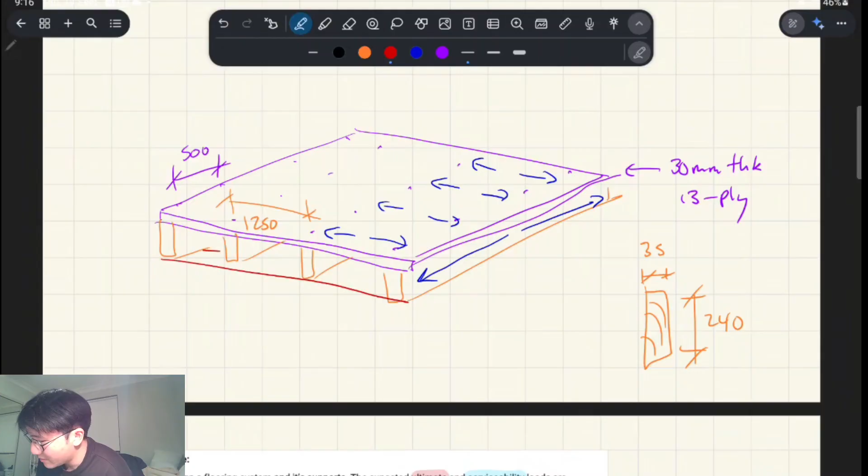So floor joists and bearers are physically the same - they might be different members, but they're essentially just sawn bits of wood, though they serve different functions. Generally, bearers are a bit bigger because they're picking up the floor joists - they are 300 deep in this case and 75 thick. The question says two of them because you have one on either side to support the floor joists. The joists are spanning 6 meters, but the bearers are spanning 5 meters like this.

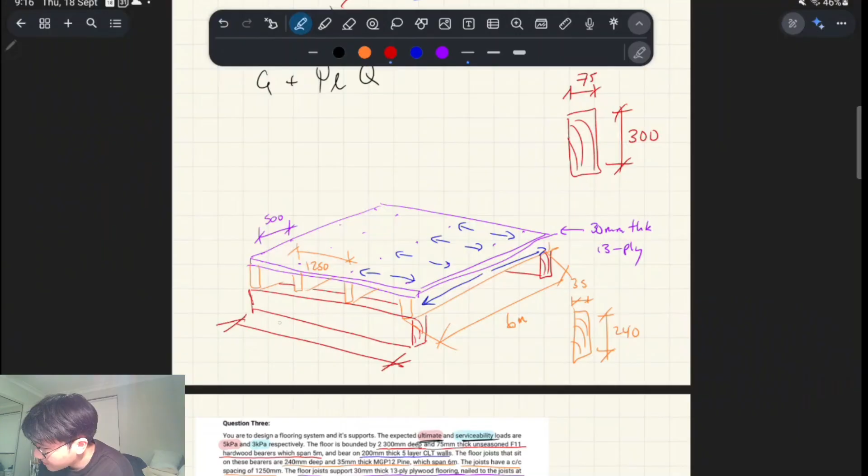So that's our system, but we're not done yet because those bearers, they bear on these CLT walls, which are going to act as our supports. We're just going to pretend that no amount of vertical load is going to be able to move these CLT walls. That's what a support is at the end of the day, right? Just something you're assuming isn't going to move. Okay, so that's our structural system essentially.

These CLT walls have 5 layers, so I've drawn it a bit wrong. The 5 layers, and the whole thing is 200 thick, like that. So that's basically what is happening.

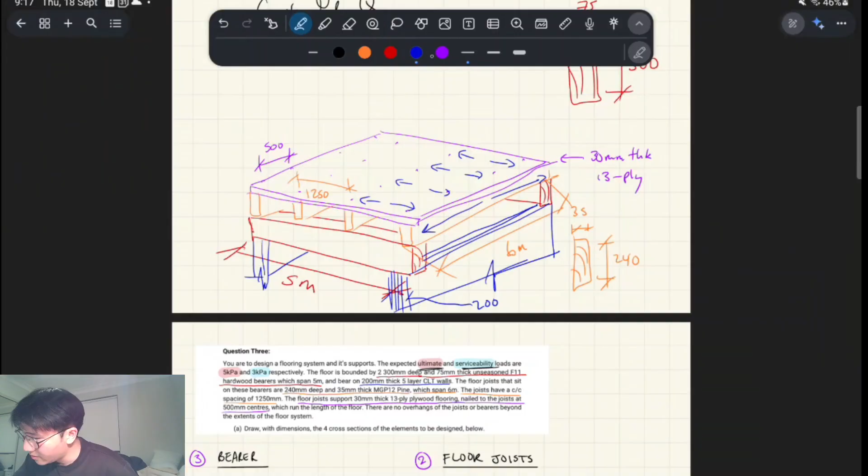So let me continue the load thing. Following these arrows, load will go onto these floor joists. We have the edge joists, which are picking up this much load, and the internal joists, which are picking up double the amount of load. That's the concept of trib width or trib area. Tributary, you can look that up, but it's basically saying what portion of the load the structural member is capturing.

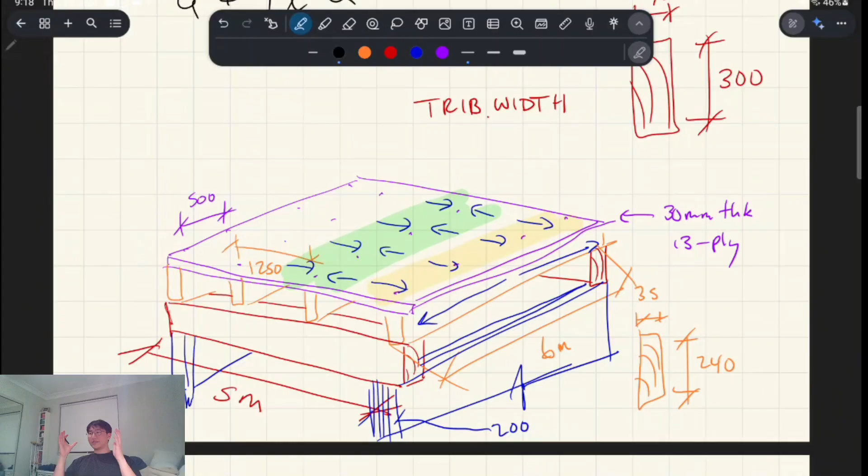And then at that point, the loads will go here, into the supports. So there'll be a certain load there, which would be a point load. There'll be another load here, which would be a bigger point load because these are the internal ones, and then a lighter load at the edge.

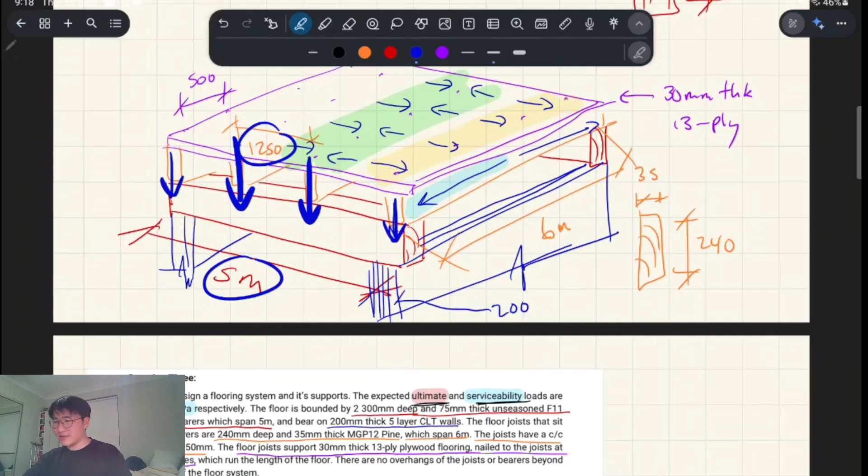So you have these bearers that are going to be taking, in what I've just drawn, which I don't think is accurate—I think there'll be more floor joists rather than, do you know what I mean? Because this divided by this, there's not going to be 3 spaces. I've just drawn it a bit simplified, slightly wrong.

But yeah, so there'll be a certain amount of point loads along there, and then those will be supported like that, pin on the walls. So basically bending moment diagram wise, boom, boom, boom. And the bending moment diagram for this one is going to be a UDL, uniform load. Those arrows are representing the amount of reaction on these supports—that's the reaction, I'll highlight that in blue.

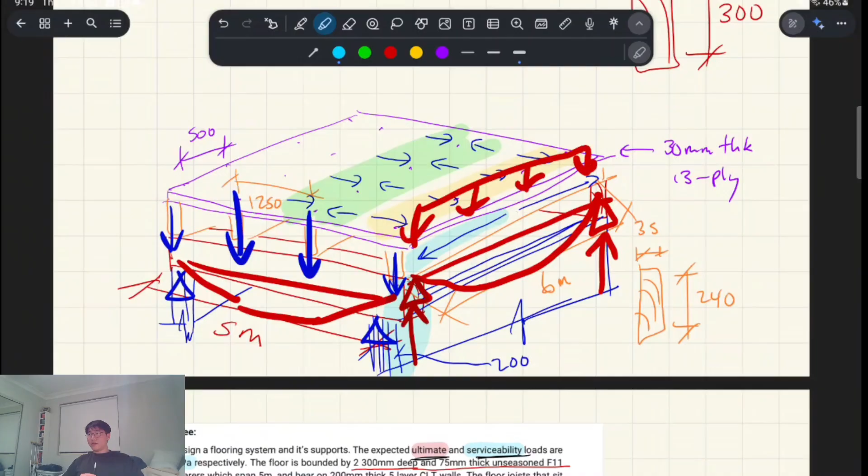I'm doing a very rushed job at explaining this, but I think the more practice you do, the better you will understand load paths. This is the load paths, and how the loads will go from member to member. So that's thinking in 3D, right? To reiterate, that's all this stuff.

I don't think I talked about this—F11 is just a type, F grade 11. Unseasoned means it's not fully seasoned. MGP 12, so this is a product of MGP, and 12 is a grade.

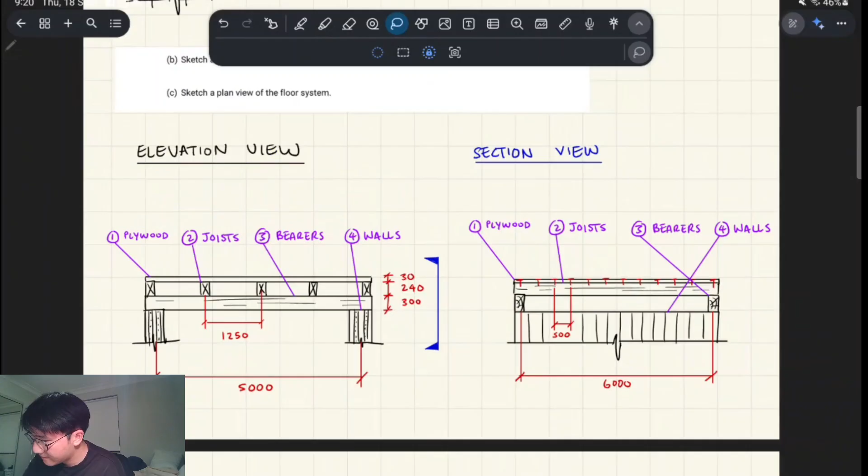Here's what the system would actually look like. So basically what I was trying to say before, I drew it like this on the bearer. Yeah, like that—that was the wrong amount of spacing. It should have been, instead of 3 spaces, 4 spaces. So it follows the load path: top down, plywood, joist, bearers, CLT walls.

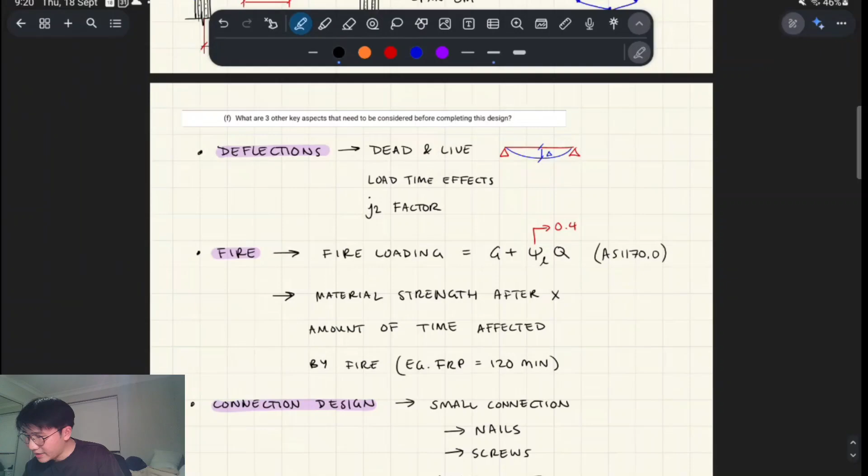Sometimes these CLT walls would be like columns or something instead. We talked about this. Okay, so what other key aspects do you consider before you can consider this design complete?

So there's basically something called creeping, which is kind of prominent in concrete design, but also especially timber design. It's basically not likelihood—it's the tendency for timber to move over time. And this has a couple flow-on effects. Firstly, we have the K1 factor, which we'll talk about next week, which affects its strength design.

Basically, if I had a timber board between my bed and this table, and I put a big rock on it, say it doesn't fail. But if I left it there for 50 years, there's a chance it fails, because timber will lose something like 45% of its strength over a very long period of time, like 50 years. And this is due to creeping—that 45% is approximate. But we'll talk about that next lesson.

So that's one. And then the second effect is deflection, so it'll deflect more over time. As well as its actual strength and capacity, it's also going to deflect more over time, which you don't really see happening in steel, for example.

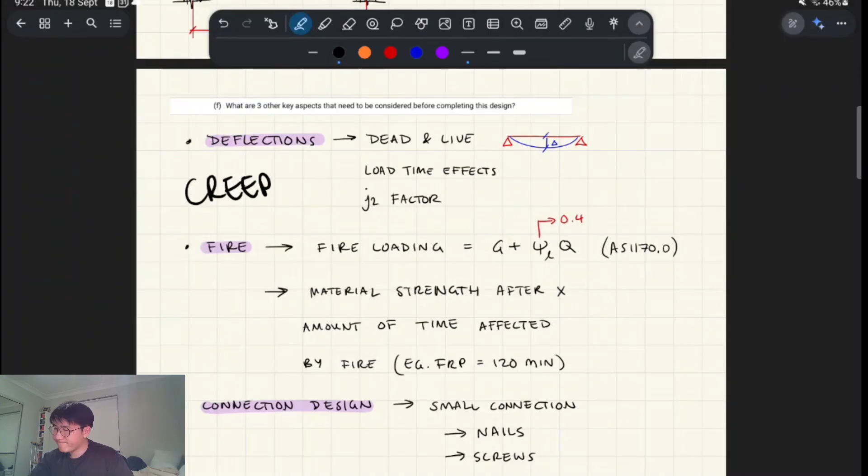I talked about this quite a bit the other day, but I just found out this isn't really in the course anymore, so I won't talk about it too much. But if you can imagine, for timber structures, a big component is considering the fire design. Timber will char and form a protective layer, and you have to design for a certain fire rating period, meaning how long its cross section will last before it fails in the fire loading case. Anyway, that's a summary, but we won't really talk about it too much in this course.

I've done a good job describing it here. It's the material strength after a certain amount of time affected by fire. So for example, 120 minutes, we have to fire rate it and make sure that it doesn't fail for that duration.

Let's see, connection design. We're going to talk about this in week 4. But essentially you have two bits of wood, and you want to connect them together somehow. You have to consider the grain direction, end grain, side grain, and the type of fastener you're using.

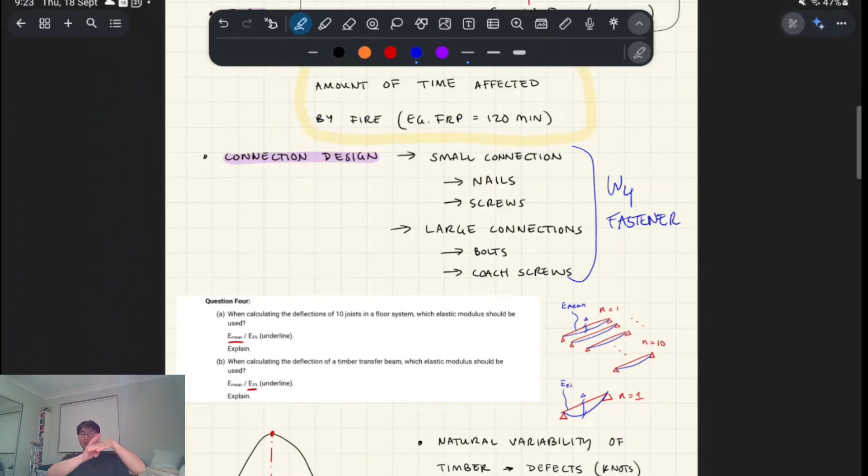Fastener is kind of an umbrella word for nails, screws, bolts, coach screws. For small connections, you can use a nail gun and nail two things together. It gives good shear strength. So if this is the nail and these are the two members, it prevents this kind of shear. But in pull-out failure, the nail is going to pull out.

Screws have better grip in axial loading, since they have little threads which can bite and prevent this kind of axial pull-out failure. Similar idea for bolts and coach screws - they both have threads too, so they're more like screws, just bigger. For bolts, you have to pre-drill a hole and then insert the bolt, whereas coach screws have teeth that can bite in as you apply torque, so you don't necessarily need to pre-drill for coach screws. Coach screws are basically just giant screws.

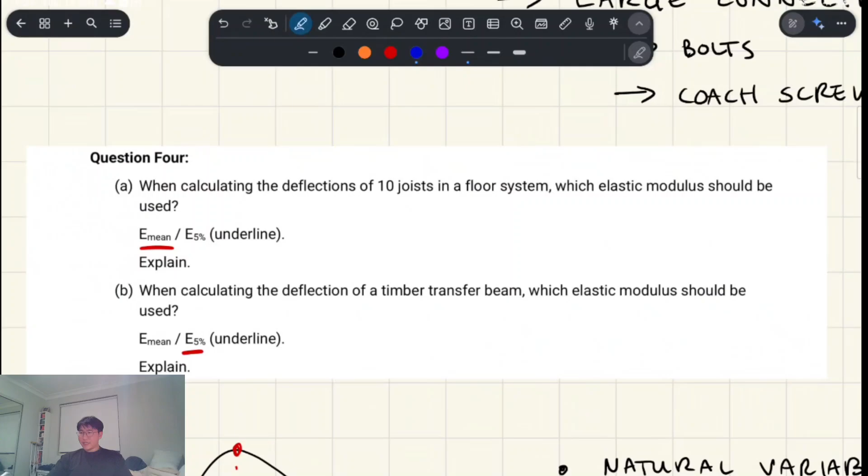Okay, lastly we'll talk about a statistical thing. When calculating deflections of 10 joists in a floor system, which elastic modulus should you use, the E mean or the E 5%? E here is talking about material stiffness. And then for a transfer beam, which elastic modulus should you use? So it's 10 floor joists in a floor system versus a single transfer beam. First you need to know what they're talking about here.

Statistically, you have a pile of 100 sawn bits of timber, and you measure all of their stiffnesses and line them up from weakest to strongest, or least stiff to most stiff. The 5th percentile stiffness is basically the 5th worst one. You have your extreme outliers, the ones with a million knots in them for whatever reason. Then your 2nd worst, 3rd worst, 4th worst, and then the 5th worst one is the 5th percentile, which is what we design for.

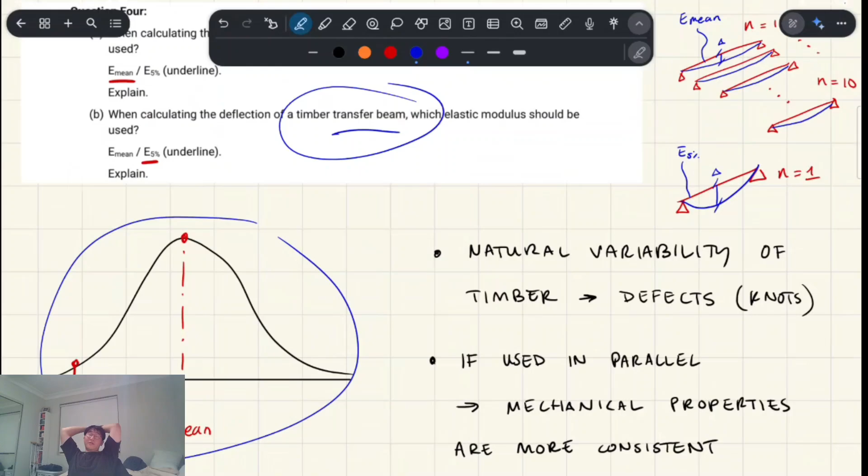Because basically in the case of a transfer beam, from the mill you don't know which piece of wood you've picked up. You could have picked up one in the middle, one slightly worse, or one slightly better. But obviously we want to be conservative and we want to pick the 5th worst one, and design for that kind of worst case scenario.

It's a little bit different - I answered part B, but part A is a little different when considering 10 floor joists. You go to the timber mill and pick up 10 out of these 100 available sawn bits of timber. Statistically, you're not going to get the 10 worst ones - you'll get one in the middle, one slightly better, one slightly worse, and so it all evens out when you have 10 of them, because it'll be more closely represented by the mean, and so you can represent it as such.